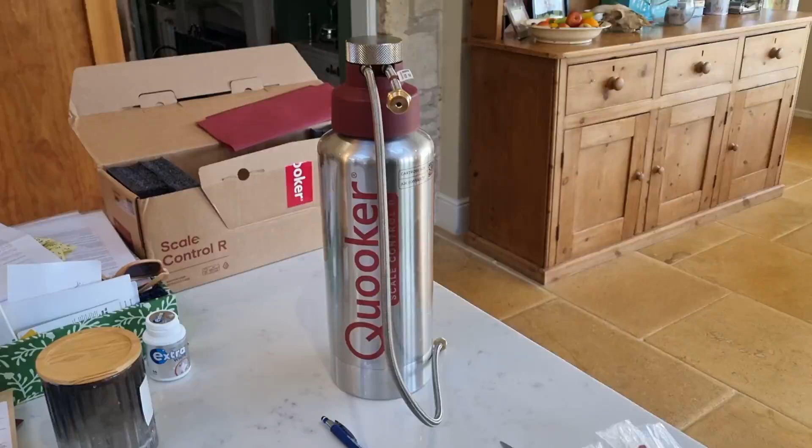After the video I did on the scale control thing, the white canister, I thought I'd follow up with the latest installment 5 years later, where they don't sell that white canister thing anymore. So now you've got to use these Scale Control R cans.

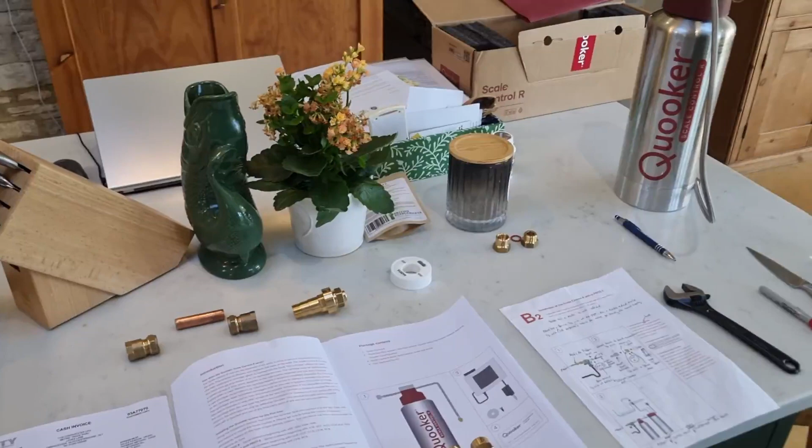245 quid for the setup kit, and I have really struggled. So I thought I'd share my experience for any non-plumbers out there who fancied giving it a go themselves.

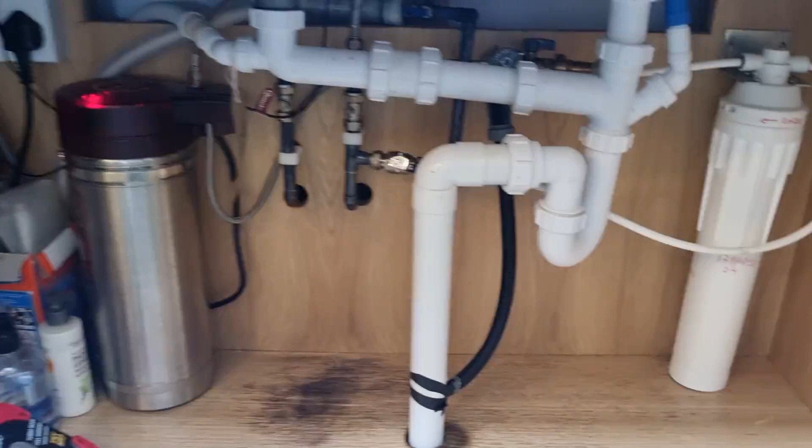First of all, I'm just going to show you or remind you what my current setup looks like. I'm going to remove the pipe work later on, but we've got a main supply coming in here which goes down this white pipe up into the old scale control thing, through this valve with a little black elephant's trunk coming off the bottom of it, and from there directly into the hot water tank.

So that's the setup as is. Everyone's setup might be slightly different, but this is mine, and this is for a Pro 3 VAQ. So mains, then softener, then through the valve, and then into the tank.

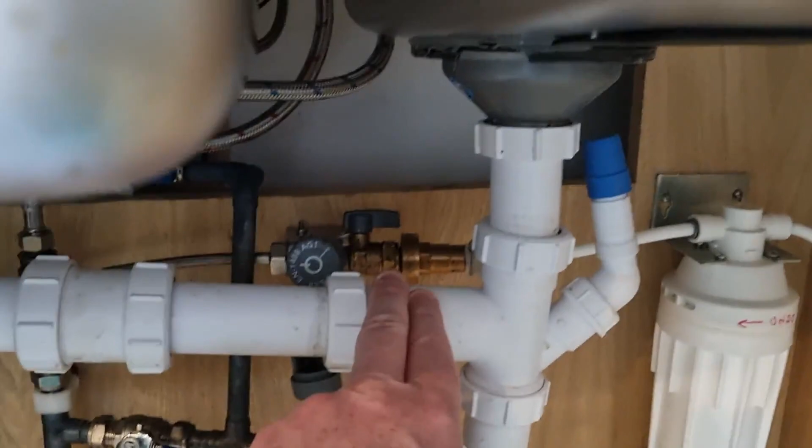Remember that. So when you receive your starter package, it will contain the big silver tank with a filter system inside, which has got one long hose and one short hose coming off it. You'll also get 3 little brass nuts.

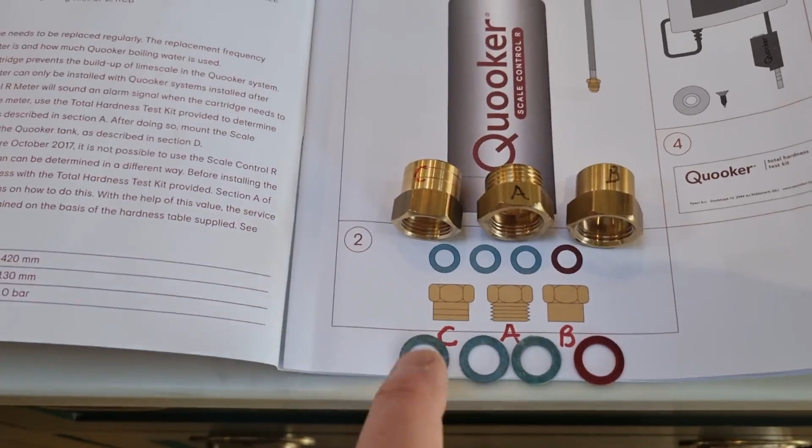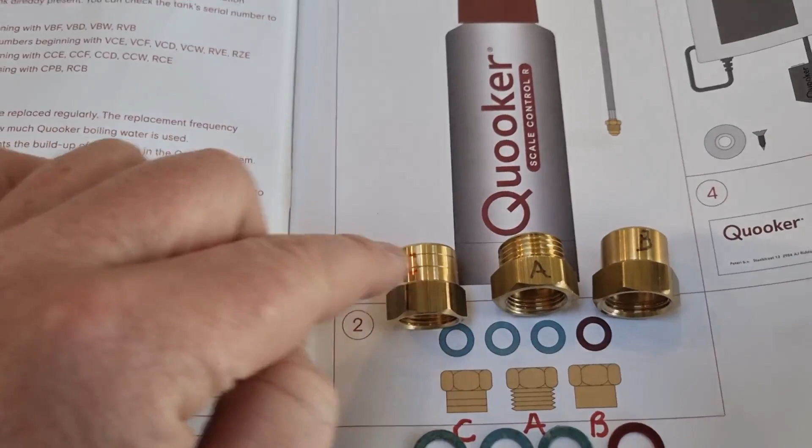Now, they don't tell you what they're for at that stage, and they don't tell you what they're for later, but I can tell you that I've called them C, A and B, and there they are, C, A and B. Slightly different — that one's got 2 lines around the middle of it, that one's got a screw bit, and that one's smooth.

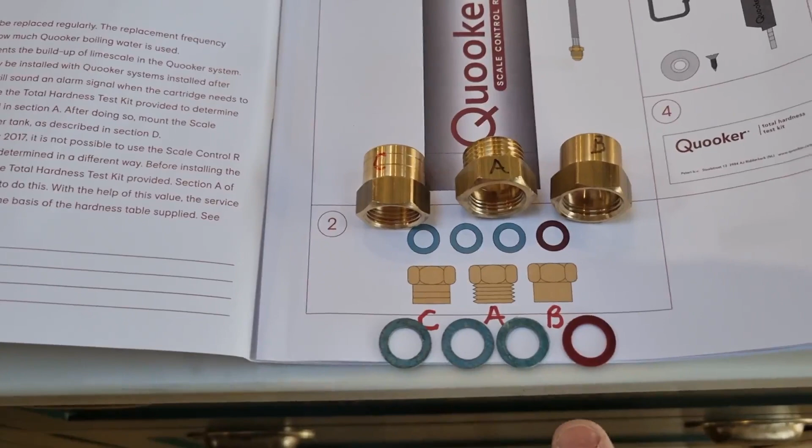This one I've still not discovered what on earth it's for, and they also come with these various different washers, 3 little blue ones and 1 red one.

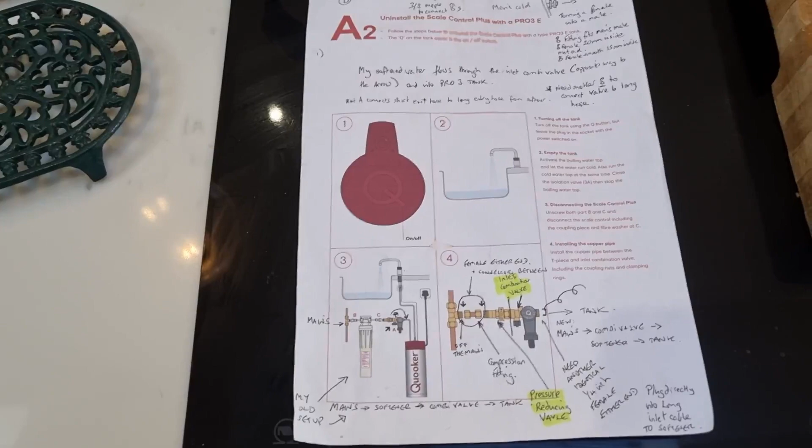Now, in the instructions that you can also download, although they don't come with the actual tank, this is for uninstalling the Scale Control Plus with a Pro 3E, which basically applies to me.

And as you can see in the picture, here we are, slightly different, but similar setup. So mains into the canister, through the valve, and then into the tank.

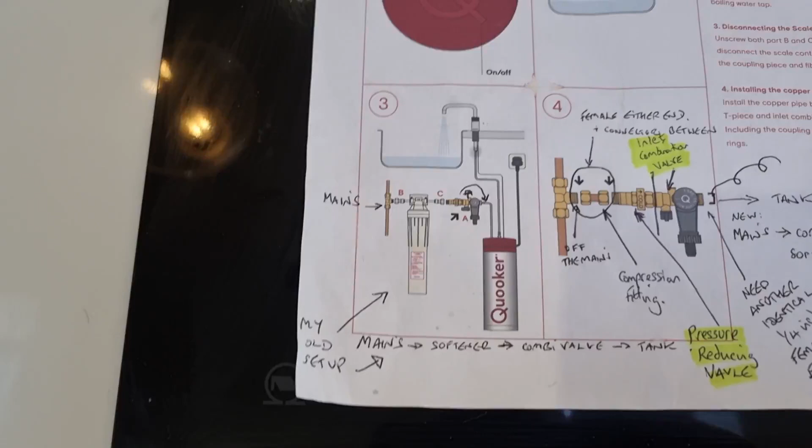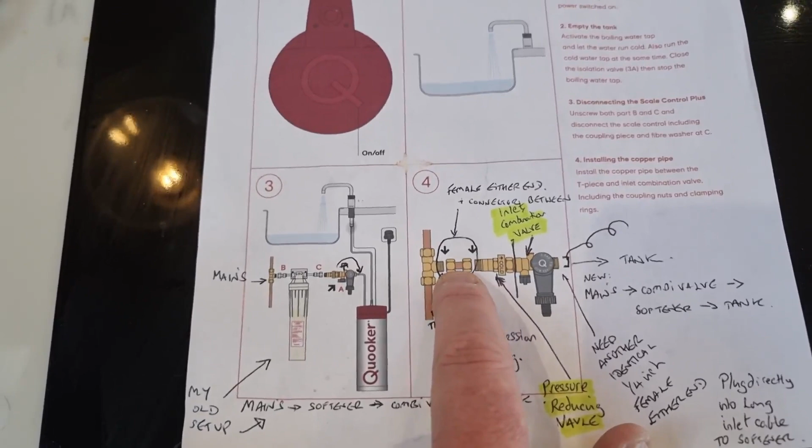This bit next to it, they don't really go into too much, and I can tell you from experience that this little bit is absolutely fundamental to the workings of your new setup, and they do not provide that.

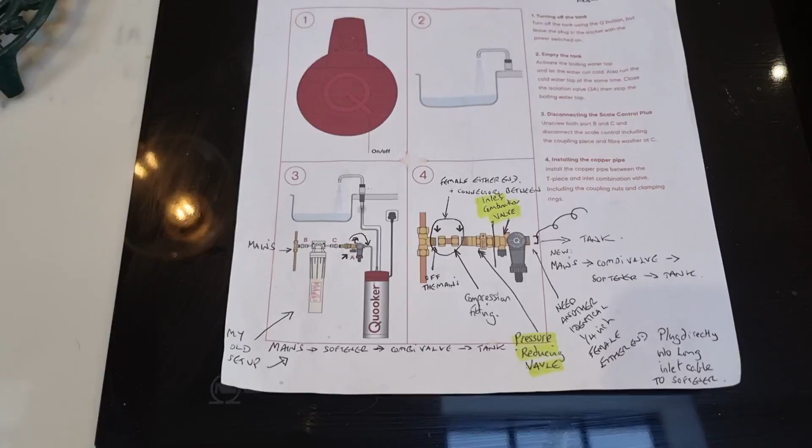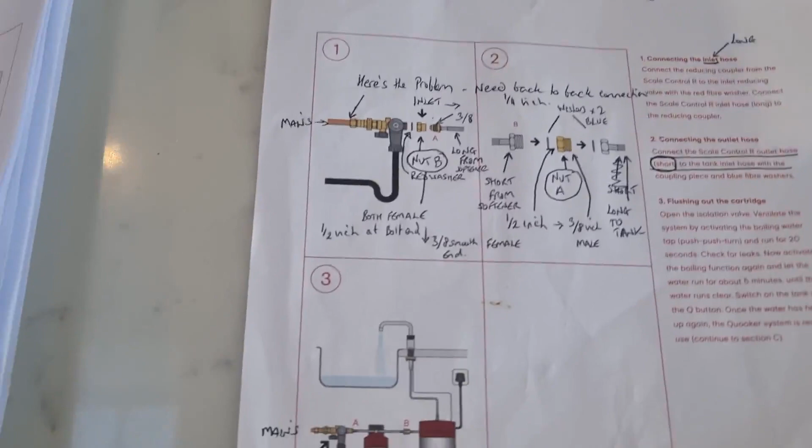Now, in the instructions for the installation of the Scale Control R with the Pro 3E, as you can see from this picture, it is a completely different setup. You have got the mains on the left-hand side, then the valve, then it goes into the softener, and then into the hot water tank.

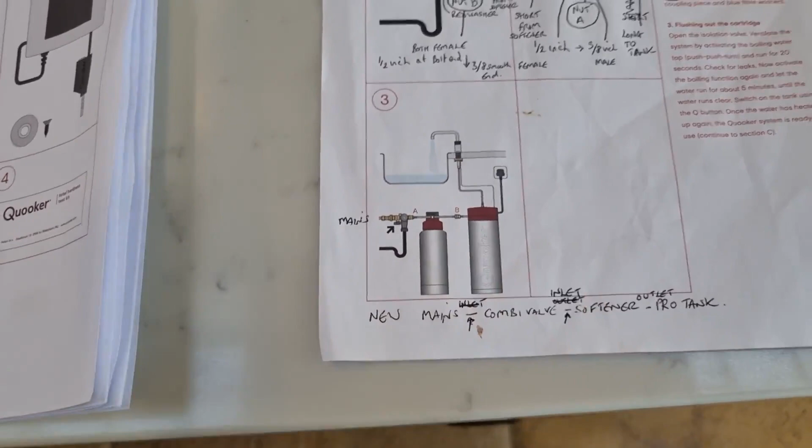So now we've got mains, valve, softener, tank. Whereas before it was mains, softener, valve, tank. All right, you with me so far?

Now, this little bit here, which I showed you before, which I said was quite critical, comes directly off the mains and connects you to the valve system.

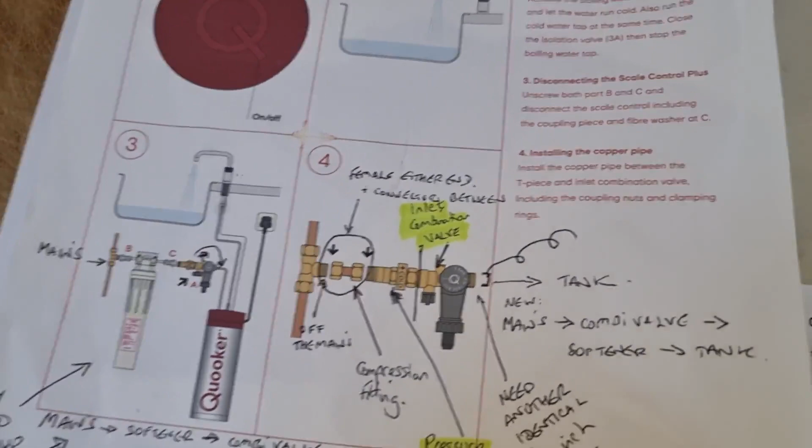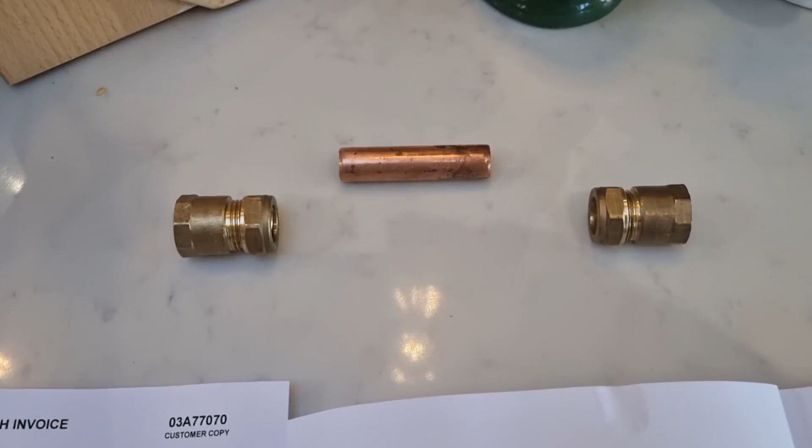Now, this bit, I can tell you, when you finally figure out what the hell it is, looks like this when you buy it at the plumber's shop. You've basically got 2 what they call compression valves, either end, with a 1/2 inch screw female connection on both ends.

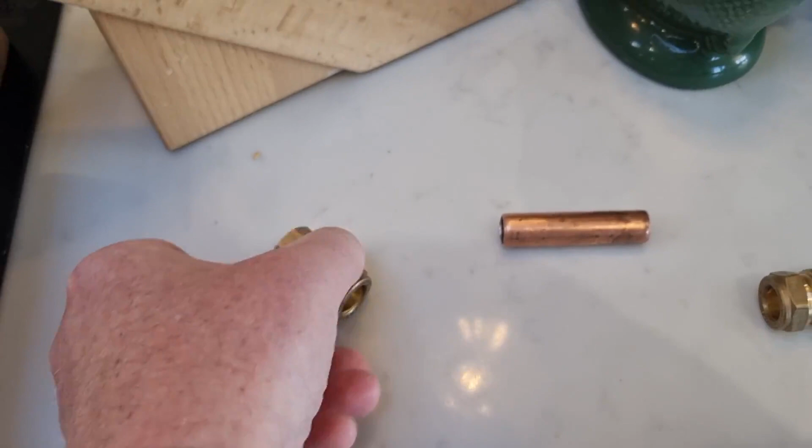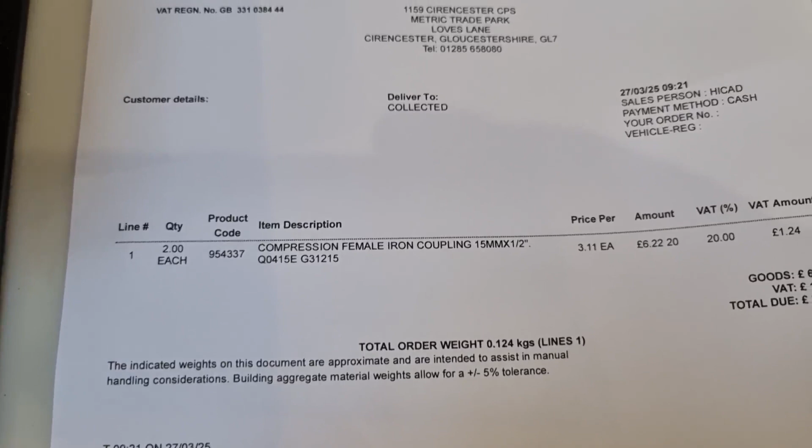This will then screw into the valve, and then you need a little bit of 15mm pipe to connect the 2 together. It's called a compression female iron coupling, 15mm 1/2 inch, and you need 2 of them, and you need to buy a little bit of copper pipe, which typically only comes in 3-metre lengths, but luckily I met a very kind plumber in the store.

The kit you are going to need includes various grippers, depending what you've got in the toolbox, and various adjustable spanners, unless you are lucky enough to have 21mm spanners in your toolkit, which I don't, so I then had to go and buy some adjustable spanners.

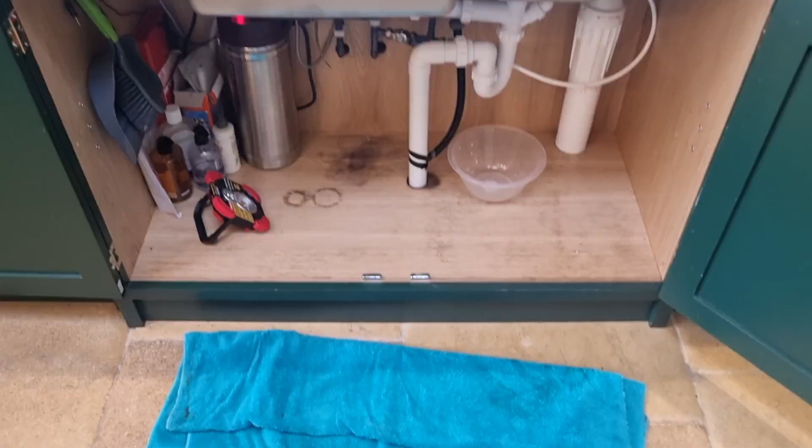So back to the Quooker tap, or the Quooker tank area. I'm going to try and turn on a torch here so we can see what we're looking at. It's a bit bright. There we go. Right.

First thing I'm going to do is dismantle all of the white piping underneath the sink, because it just makes it a lot easier to get to all the bits and pieces.

I would strongly advise you get a bowl and put it underneath, and probably a towel in there as well, because this bit will be full of water, and tip all that out. And once you've got it dismantled, under no circumstances should you pour anything down the sink, because there will be no pipes there, and you'll be surprised how you forget that and then curse yourself when you do so.

Okay, so error 1. I've dismantled the pipework, and then I've suddenly realised I shouldn't have done that, because the next thing I have to do is drain the hot water tank, and 3 litres of boiling hot water I don't really want in the sink or all over the cupboard. So I'm now going to have to rebuild it all again. Such a muppet. Right, so that's rebuilt again.

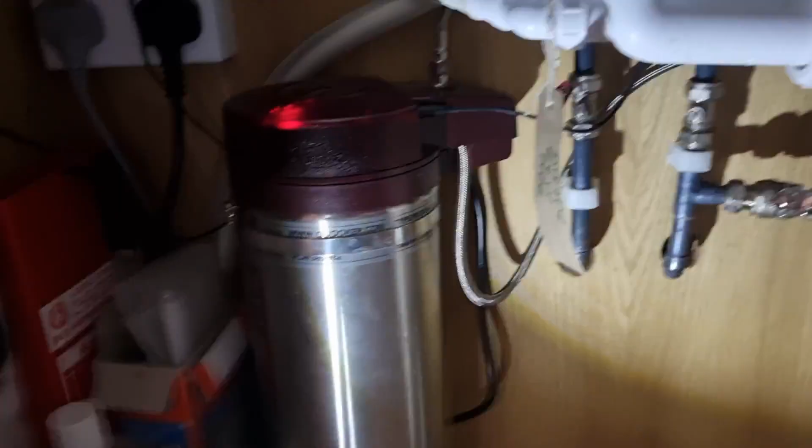So next thing is you turn off your Quooker, press the little Q tail, and then turn off your main supply, and then clean the grubby stuff out of that. It's not very strong because the main supply is not on. Maybe I should turn the main supply back on. That's better, pushing it a bit harder.

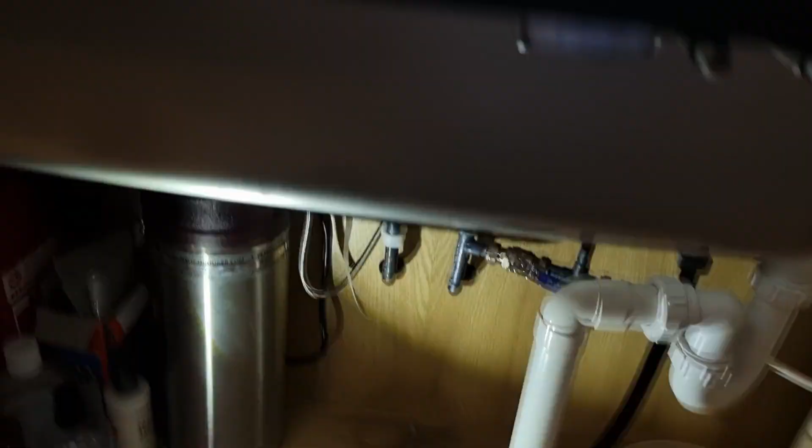And they also say you should turn on the cold water at the same time. Hopefully no leaks - no, nothing pissing out of there. Right, now we've got to wait for the hot water to drain out. Okay, so let's put a bit of cold in there as well to flush it through.

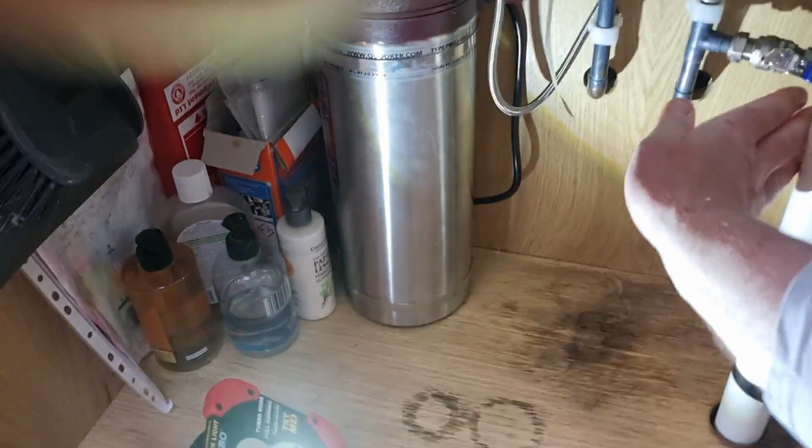Yeah, that's pretty cool now, so we can turn that off, then turn the mains off, and then turn this little thing on the top of the valve off as well. Right, so that should now have killed the water supply.

Now I can take the plumbing bits apart. I'd advise you take a picture of what it looks like under there before you take it all apart. And then you've obviously caught a load of water in the bowl - don't put it down the sink, just chuck it out the window.

Okay, having done that bit, we've now got to remove the old white canister by undoing these 2 nuts, top and bottom. Might be an idea to put a towel in the bottom of it, because you never know. Anyway, I'm going to undo both those. I think they're only a 19mm spanner, but it looks a bit bigger than that.

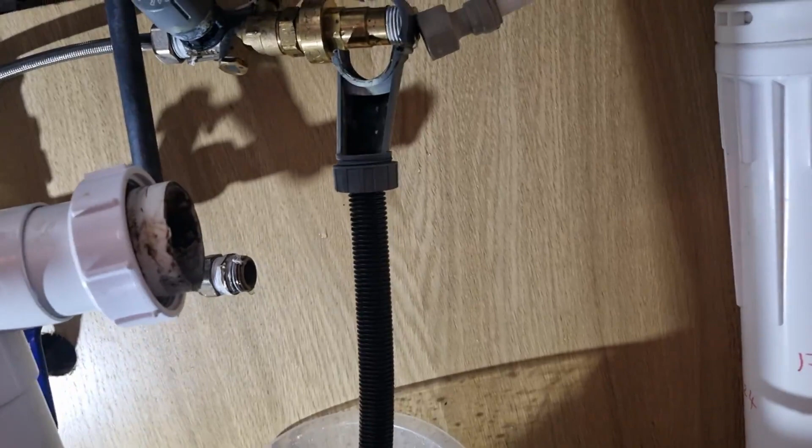I'll tell you when I've finished it. Yeah, definitely needed an adjustable for that. They were bigger than 19mm, so I guess they're probably 21mm as well. So yeah, now we've got the top one unscrewed - they unscrew towards you, and same on the main supply at the bottom. That's now come off as well.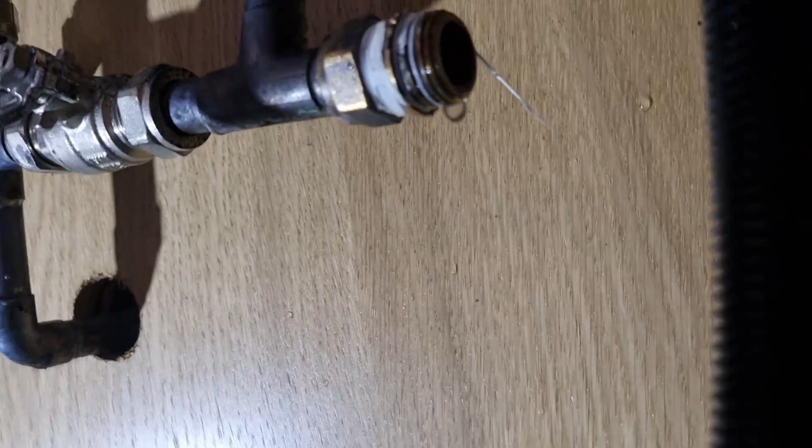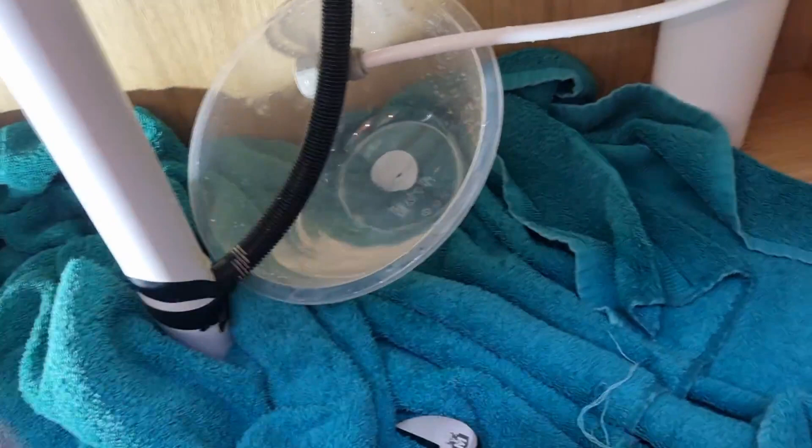You'll notice this is a male adapter, or it's been adapted with a little bit - obviously it's female there, then it goes into a male there. That bit at the end does actually unscrew, but leave it in for the time being. And yeah, we've had a bit of water come out the bottom of that as well, but we managed to catch it. So that goes out the window as well.

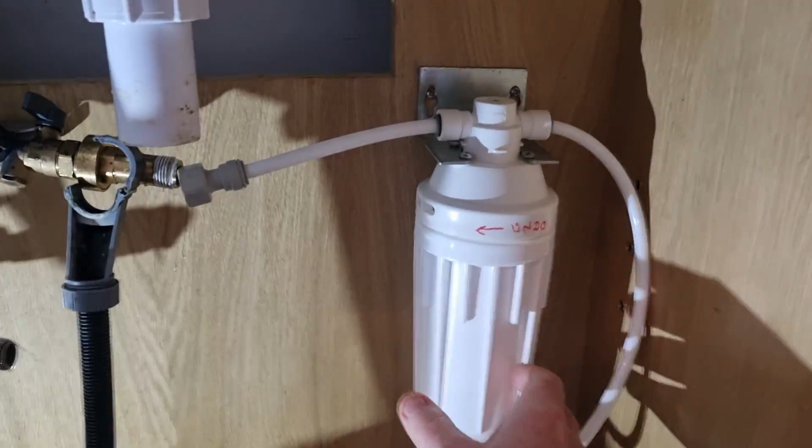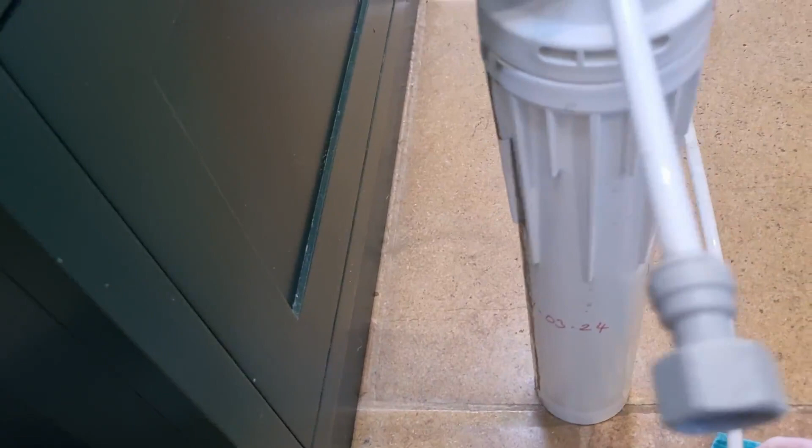So the next fun and games is removing the canister, which I can lift off on this bracket and just pull that out. Oh, still losing water. I've got a little helper come to have a look. Okay, Cowboy, what do you reckon?

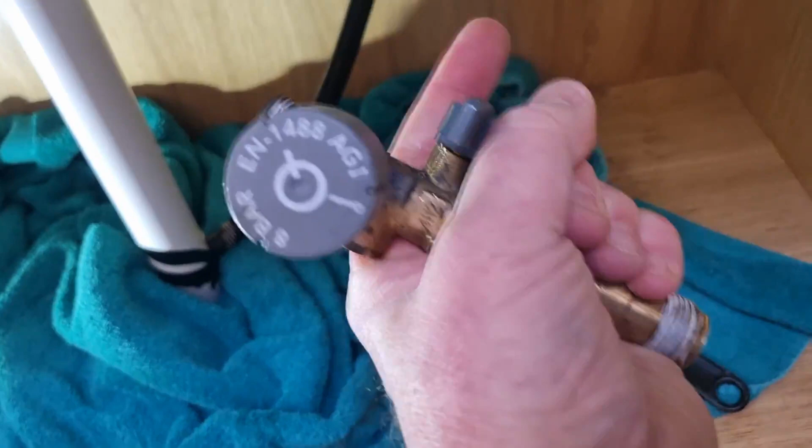So I think the next thing, we've got to take that valve off the top, which is going to require unscrewing that little nut there. Right, I found it easier to unhook it off the bracket so that I could actually hold it in my hand, and then I could get the spanner on the nut and undo that.

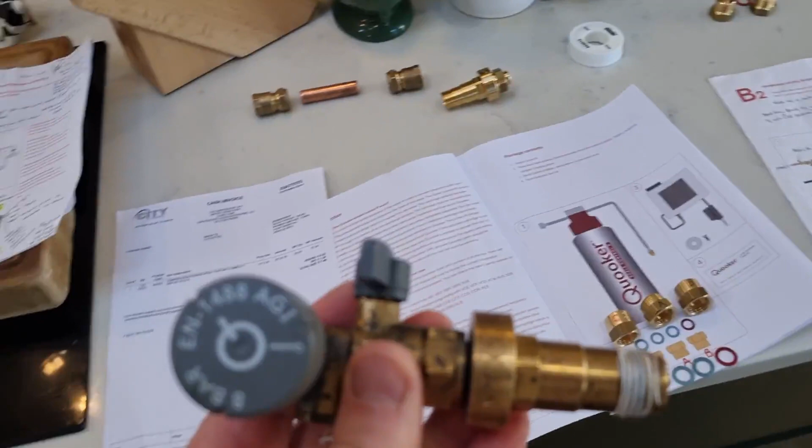So yeah, this little valve system is basically a pressure release valve. Each time the Quooker thing reheats itself or fires up, as it does now and again, this releases pressure and creates a spill of water coming out of there, and that's why you have the little black pipe attached to the bottom of it, which then goes into your outlet pipe down below. Mine leaked like a bugger, so I've had to tape it up - I'm going to try and do a better job on that.

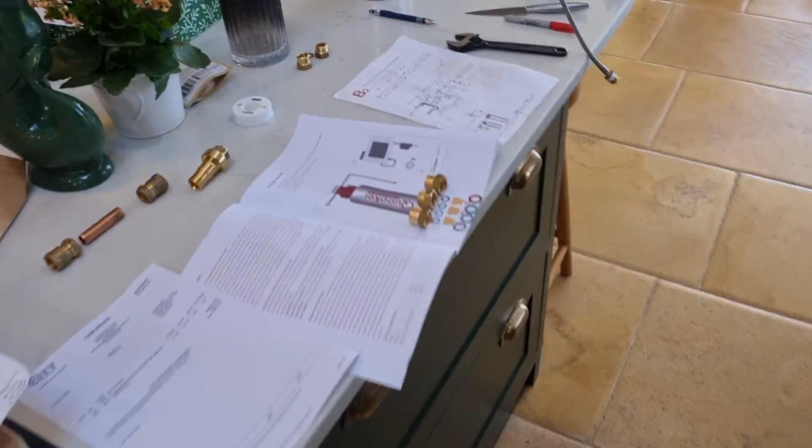So this little piece is actually two separate pieces. Quooker kindly sent me a replacement part - God knows why, I didn't really need it. But anyway, that gives you an idea how it goes together. This is basically a little compression nut, and the thing will spin around and then attach that. I don't know whether I'm going to bother replacing that part - this one seems perfectly good to me.

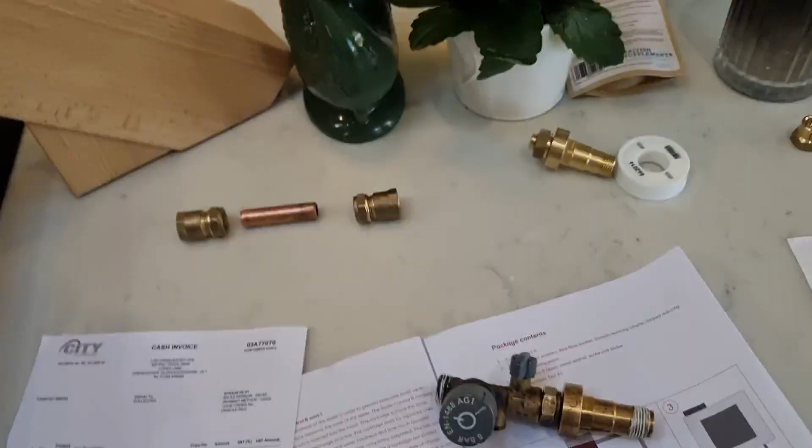Hey, we got that bit on, super tight - more white tape. And now we thread the opposite end on, and we're going to attach that to one of these. And that is then going to give us the connection, finally.

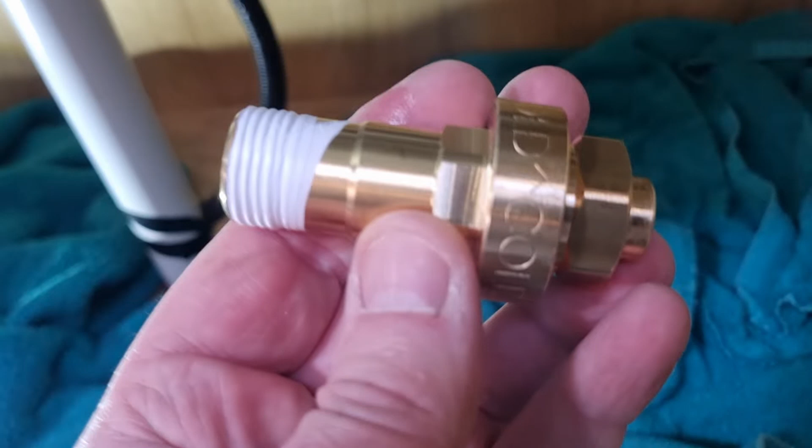Okay, we are now making progress. So the next thing is this little chap. And as you can see here, let me get it focused, there we go, cold and an arrow. So water coming from that direction, going through here, and then it's going to be going out to the softener.

So I've actually opted to go for the new one. And I've detached it from the valve because it's probably going to make it easier to actually screw in. So let's try that. Okay, next bit attached. Crikey, look at it all.

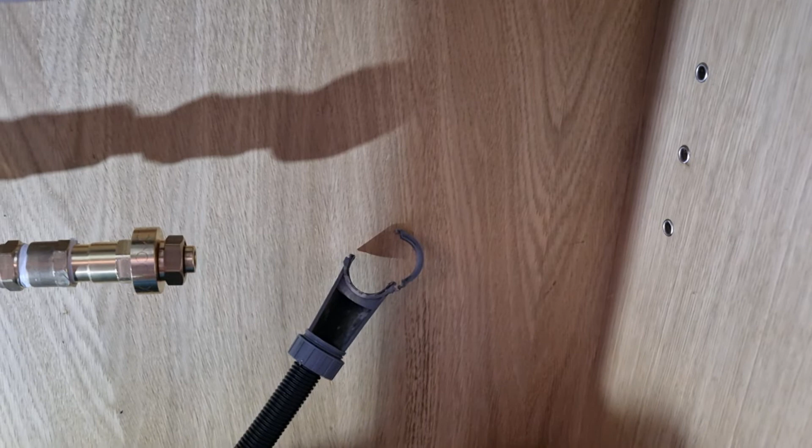I mean, the only thing that's slightly concerning me now is that we're fast running out of space for the actual tank to sit in. So are you going to fit in there? We've still got to put the pressure thing on as well.

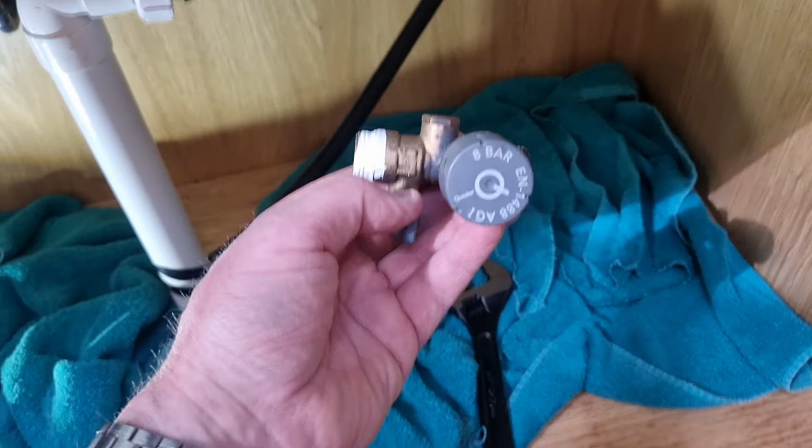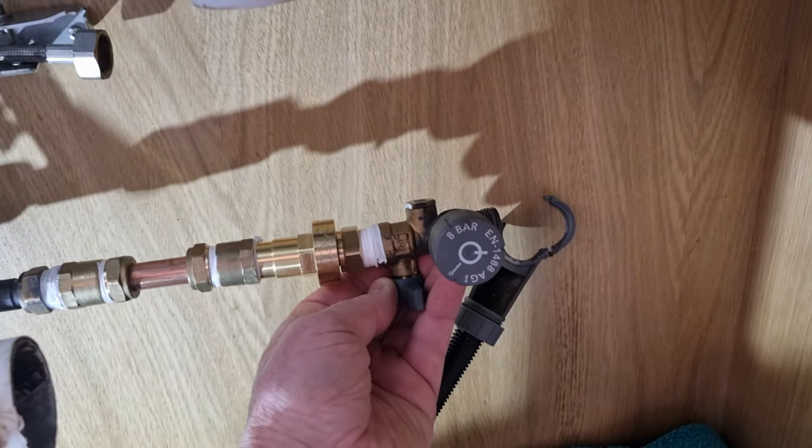Right, let's try that now. Right, the last piece of the puzzle, or at least the last bit of this complicated bit, is this pressure relief valve. So that's going to be mounted on there, and it's the grey handle kind of open close thing at the bottom. So now we've got to screw this one in.

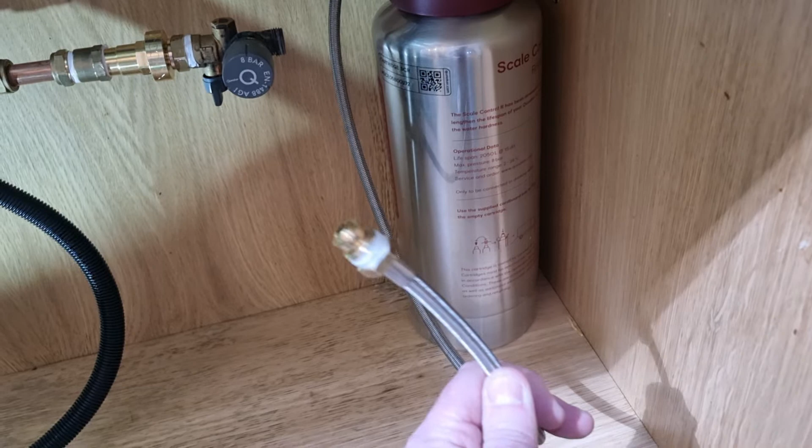Right, well it looks like we've just about got enough room, although this lower piece coming off the pressure one is going to attach to the long hose of the two, so we might have to wrap it round a bit to get it out of the way. And we're going to use one of the A, B or C nuts that we were provided with.

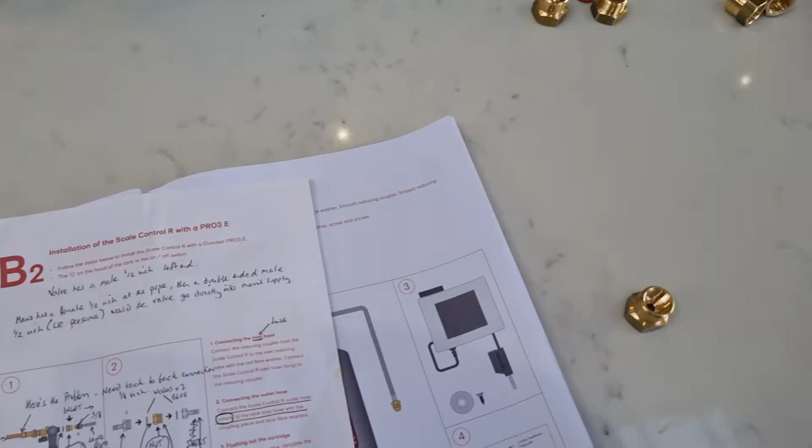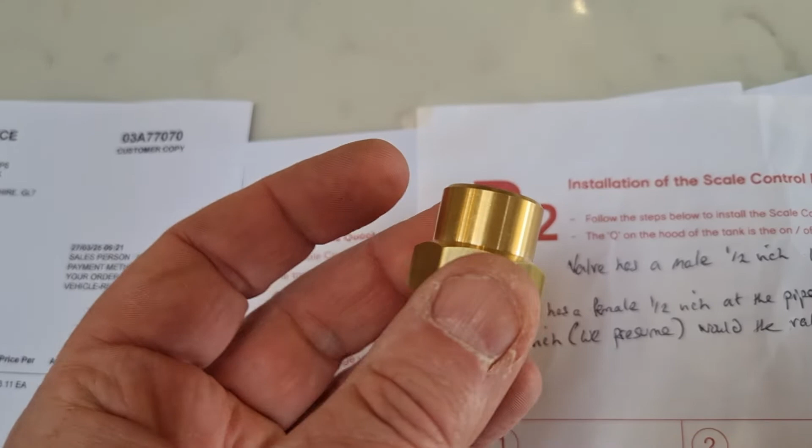Let's have a look which one we need. So the answer is we're going to need nut B, which is the one with the plain bit, half inch. I think it's into a 3/8 of an inch.

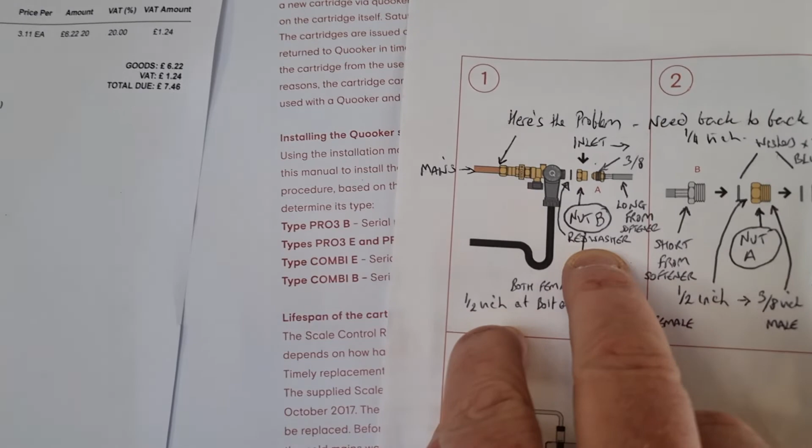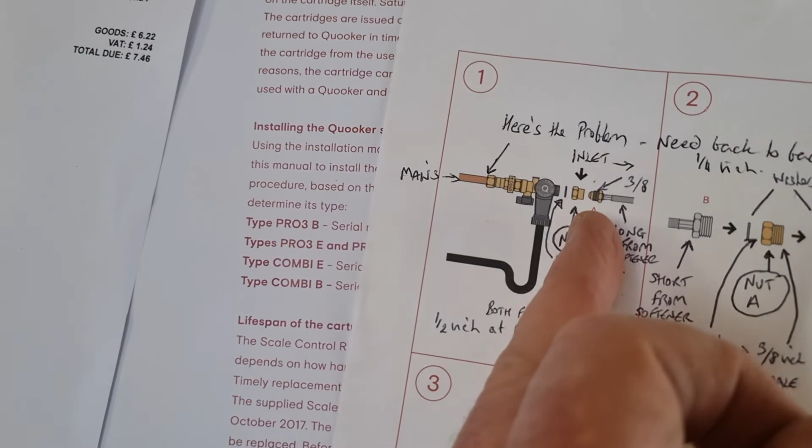And we're also going to need the red washer. So let's take a red washer and pop that in there as well. That goes between, okay, it goes between the pressure valve and this nut, and then the long bit goes into the back.

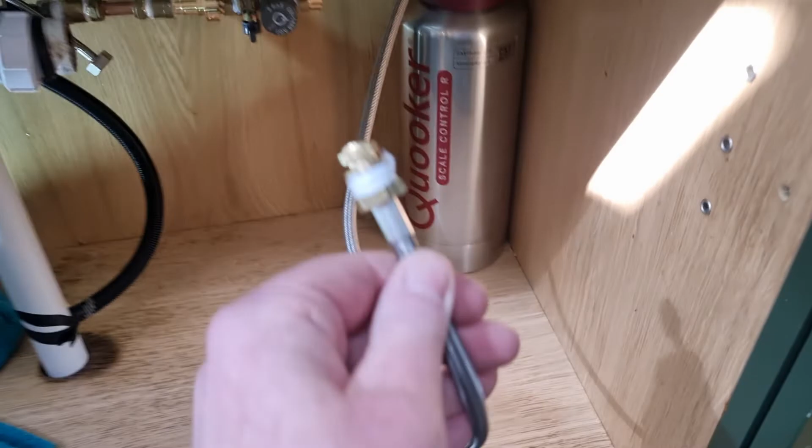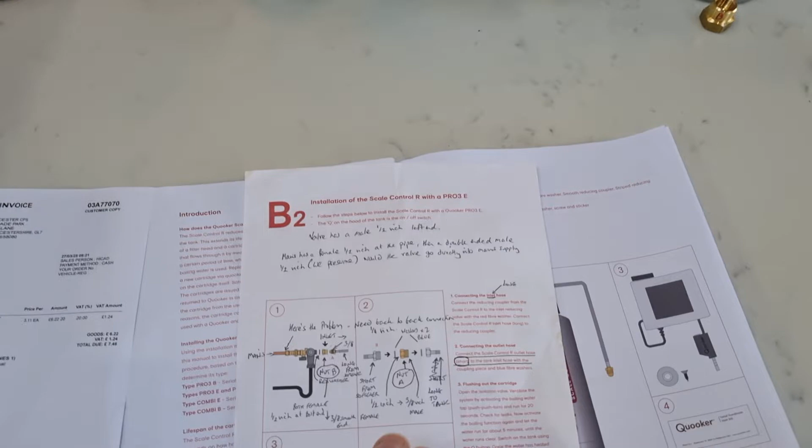Okay, that's on, and so now the last bit is to attach the long hose to that bit. I'm going to wrap it around the back there and then try and get it to come in pretty straight. Actually, just double checking, it doesn't seem that I've got to put any kind of washer in between that and that. So it's just that red one I had to put in there.

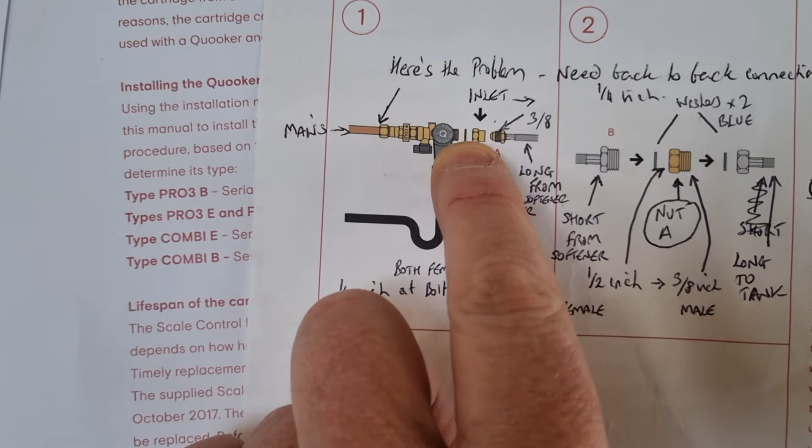We have to put some blue ones in the next one we do.

Right, the final bit of this monkey puzzle is to connect the short lead off the softener tank to the original long lead off the hot water tank. And for that we're going to need to use another adapter nut, but only one.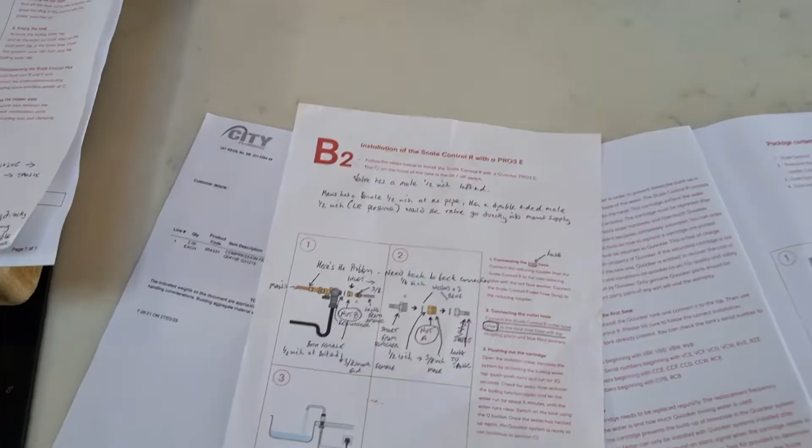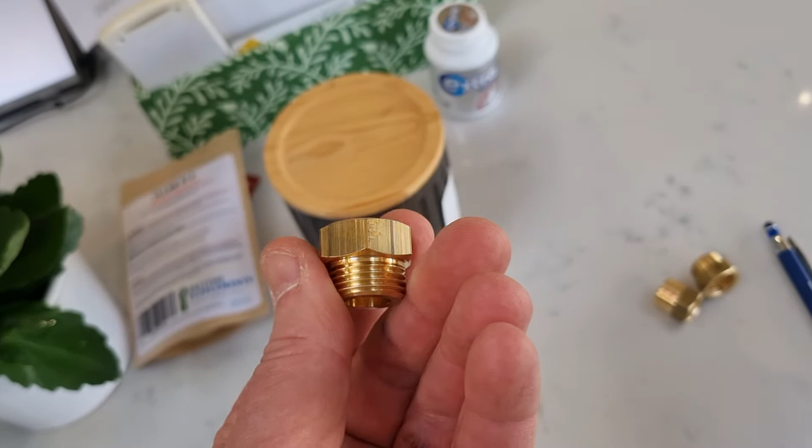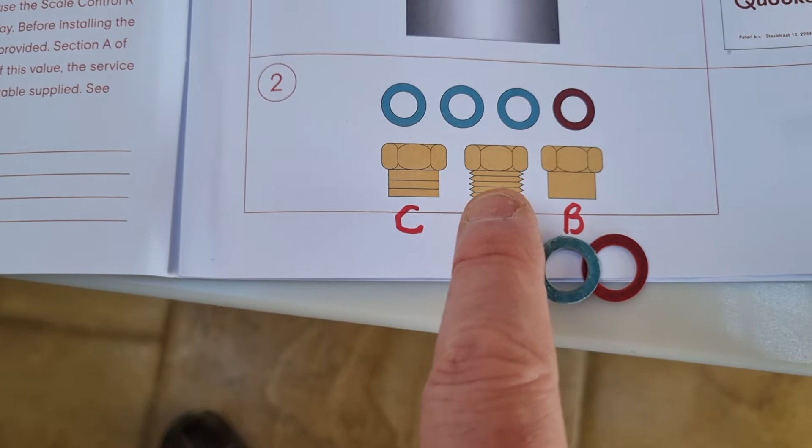And the adapter nut for this piece is adapter nut A, which one was it? That's got nothing written on it. Here we go. Similar to that. So that's the one with the half inch bottom on it and then a male screw top. That was, what was it? A, yeah, that one. And we're going to need a couple of the blue washers.

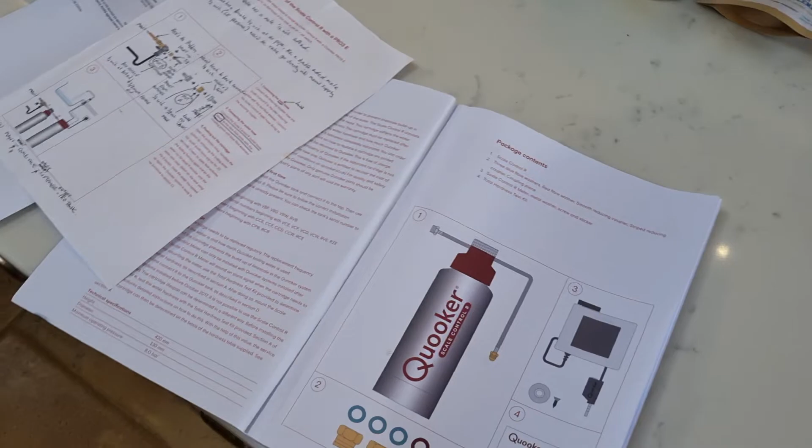So, oh, great, dropped the other one. Sod's law. Where's that gone? Right, found it. So that's the way around it's going to go, and it's going to go between that one and that one. Easy.

Okay, nut A is complete. That should complete the circuit. So the only last thing I ought to do is to reattach this, which I'm not sure whether it's quite going to be long enough now.

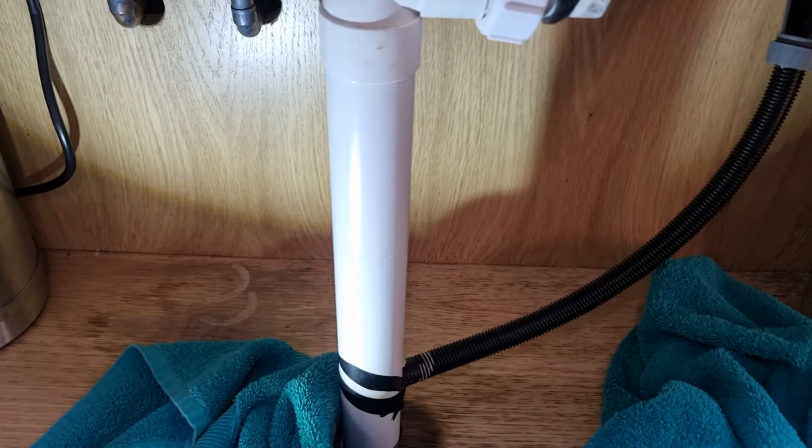Anyway, that is supposed to sit on there and catch the dribbles coming out of the pressure and then go down there. The kind folks at Quooker did tell me, or warn me, that this now might be a bit low. They like to have it higher up in case there's a blockage in your downpipe from the sink, which then backs up here and starts pissing out all over the floor, but fingers crossed it won't.

So the only thing we've got to do now is just check everything's done up tight and then turn the pressure back on and then stand well back. Okay, here we go.

Oh, I detect some leakage already. That's down to 1. Right, let's just give that a really tight one and see if we can stop that.

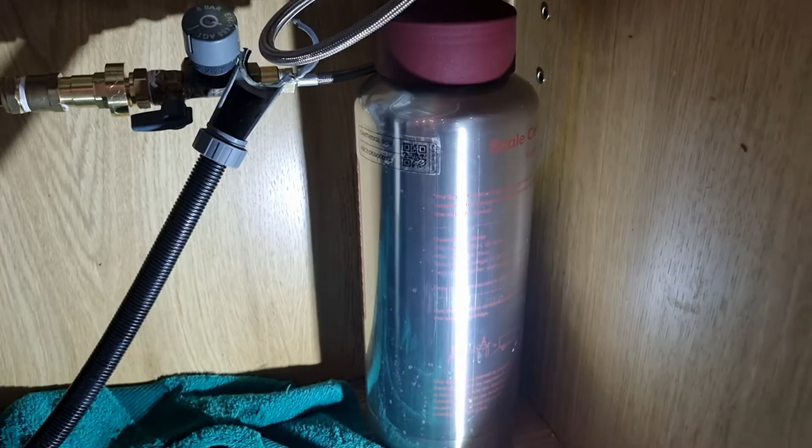Oh, this is frustrating. The thing is, you've got so many different bolts and whatever you call them, down there. You tighten one up and it loosens another, and then you go back and tighten that one up and it loosens another one. Oh, got tiny little dribbles coming out at the end there, which is really annoying. But long and short is, it is now built, so it's just a question of tightening up.